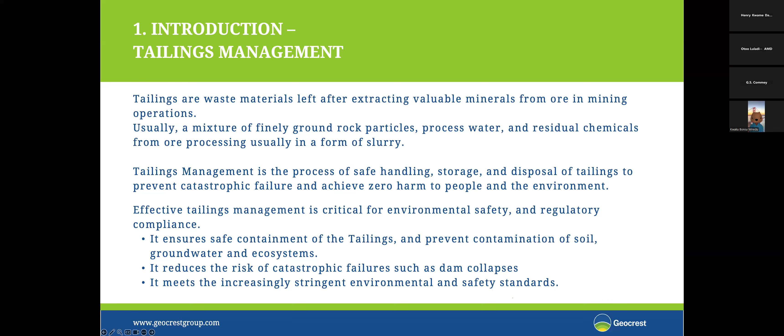So tailings management covers the entire life cycle of the facility, but managing it involves certain key aspects. With this, I also touch on some of the skills that will be required. So we look at characterization and planning.

Like they say, if you fail to plan, you plan to fail. So where you even want to site or locate your tailings facility, its proximity to nearby settlements, is very important. Just look at the geochemistry of the tailings itself. So you need people who are very good with waste rock characterization to come in and advise you through the life cycle of the tailings.

You also have the TSF design. This relies a lot on computer-aided design, CAD. So if you are trying your hands on AutoCAD and other software, I think that is the beginning, before maybe you move into Slide, Wedge, and Map3D and those other software packages you need, because you need to make sure the structural integrity of the facility is protected.

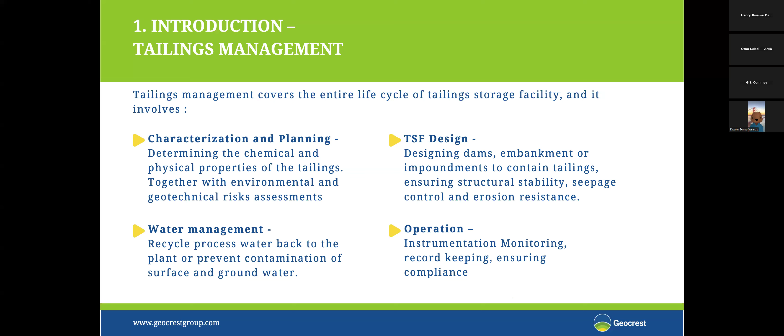And then the last part of the life cycle is the closure and then the rehabilitation. Since we'll be talking more about thickened tailings and paste backfill, we need to drain the water out of it, because tailings management is basically about wastewater management, how you manage water.

When it comes to closure and rehabilitation, for me, I prefer when the land is restored to its original form, not just to the initial topography, but making sure you reintroduce the original flora and fauna that were there before the mine even came. In the life cycle of a tailings or mining operation, the environmental teams put in a lot of effort trying to preserve most of these natural or indigenous plants and species.

So it's very good if we are done with the tailings facility, you're able to restore it to its original landform. The picture below gives an idea of a cross section of a general tailings facility. You have the core impervious fill, and under drainage systems that are able to filter out any form of water. You have the riprap, which is basically waste rock put on the upstream section to control erosion. And freeboard is basically the space between the crest of the embankment and the level of the decant water.

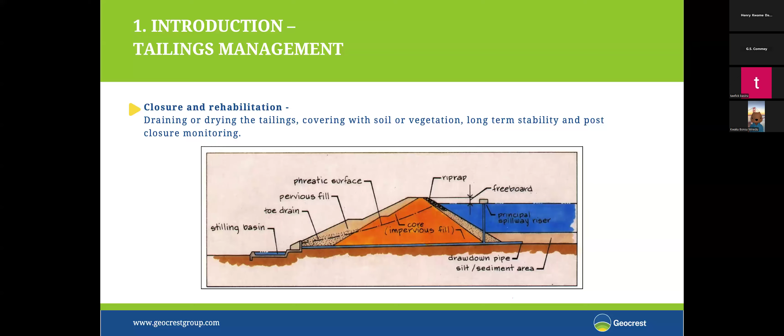So now we'll move into the transition. I've just gone through what a tailings dam is and how tailings dams are managed. Now I want to go into the transition, and once we move from that, we'll look at thickened tailings and then paste backfill. Then we can look at the operational challenges.

Mining operations evolve, as human as we are, we ourselves are evolving over time. We are evolving as a species, and there's continuous improvement. So whatever you're doing, look at ways to improve upon it, look at ways to make it better. When it comes to tailings, there's a lot of focus on how we can make it environmentally friendly, and also now a lot of focus on ESG, achieving certain goals and aligning to certain protocols and systems.

The conventional tailings facility usually has high water content. And if I may say, this shift is not just technical, it is also strategic because it has to reflect our commitment to safer, more responsible, and more efficient mining practices. One of the countries that have really taken advanced tailings management methods seriously is, I'll say, Chile and then Peru.

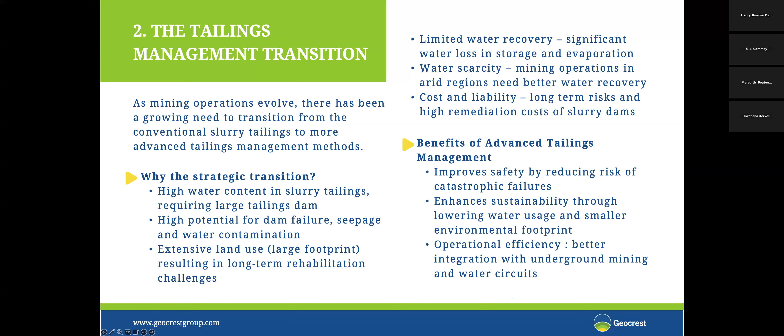So now we'll look at thickened tailings, and this is usually for surface tailings disposal, and it is what we usually call the stack. Once the material comes, I'll share the next slide - I'll share some pictures with you on how a paste, like a thickened tailings facility, looks like.

Usually they extract the water out, and you work with certain specifications. So the target might be to not go beyond 18% or 20%. Let's reduce the water from the slurry from, let's say, 65% to 20%. Once you're able to reduce the water, what you have left is what we call the stack. It's sometimes like, I would say, biscuits. When you extract the water out of it, it comes in like thin sheets, and then you spread it over the surface, allow some bit of evaporation to also improve on the moisture, and then you spread subsequent materials on it.

Some of the benefits for thickened tailings are significantly reduced water loss, also smaller footprint because you're not holding a lot of water. There's improved geotechnical stability - water causes a lot of problems with tailings. There's also reduced risk of dam failures, and it leads to a more efficient and cost-effective mine closure process by creating a better landform because you would have released most of the water. So what you're left with is just the solid particles, which is easier to manage than when it's in a slurry form.

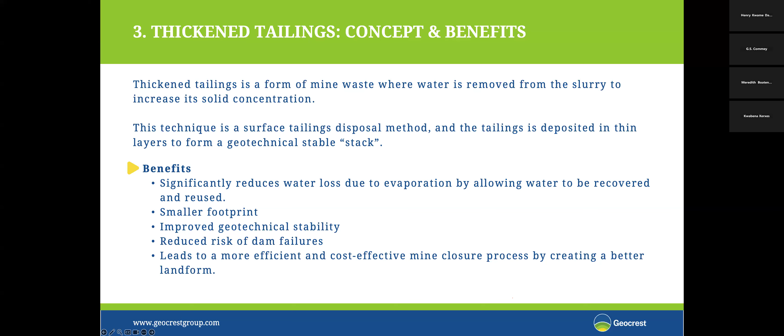The challenges with thickened tailings is that it requires specialized equipment. So if you build your conventional processing plant to treat or extract the ore, you also need to have an adjoining plant whose sole job will be to extract water from the slurry, leaving out the stack. Also, it requires careful pipeline design to avoid blockages. This is where, for some of you, you can also consider hydraulic engineering. Sometimes we rely on hydraulic engineers who are able to work out the flow rates, the viscosity, where to put the bend, how to do the gradient of it to avoid blockages and some challenges in operating a facility.

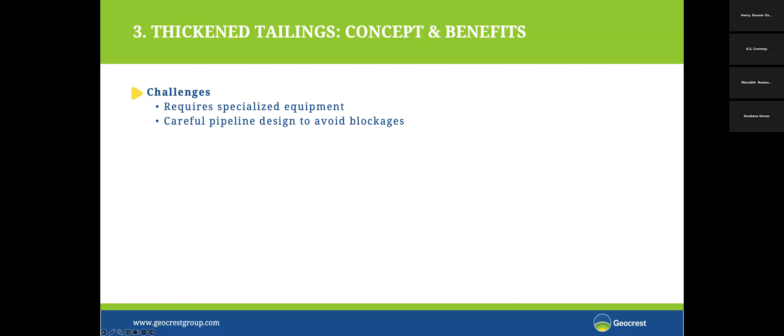Like I did mention, this is an image of a thickened facility. So they usually add a flocculant. A flocculant will basically clump smaller or finer particles together so that they can be easily transported. Otherwise, they will keep floating and it will be difficult for you to decant the water or to reuse the water, if I may say.

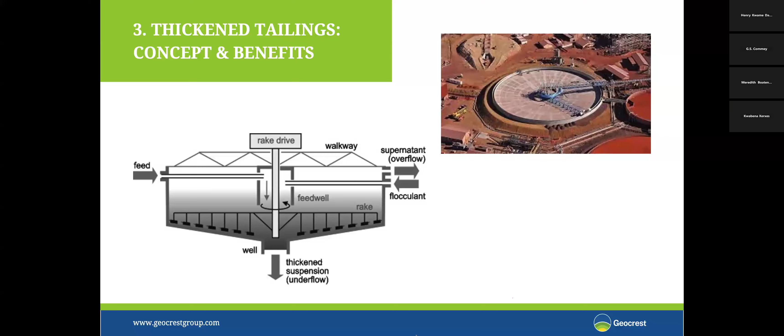So now we'll touch on paste backfill. Thickened tailings has to do more with surface operations, and paste backfill deals with underground operations.

With this, what you simply do is take the conventional slurry, that's the tailings, mix it with cement or other binding materials, and then pump it back into the underground voids and fissures to provide some form of stability for the facility.

So it supports the underground structures, reduces surface disposal, improves safety, and reduces the waste footprint. If you notice, safety is very key in mining, so both of these, safety still comes in here.

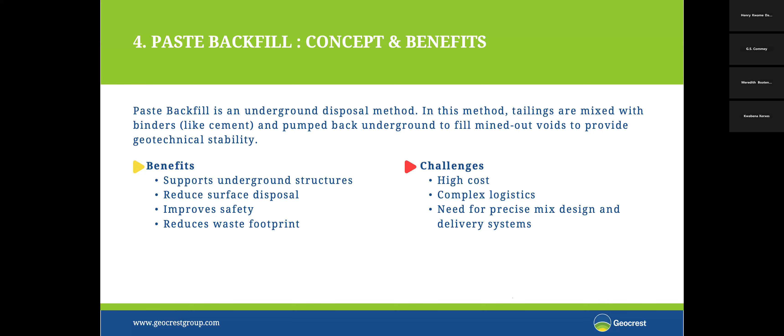One of the challenges is that it's high cost because you need to buy all those chemicals, plus the logistics in moving them to make sure they get to the right places, with vibrations here and there to make sure the material sinks and sits where you want it to sit. You also need precise mix designs and ratios to achieve what you want.

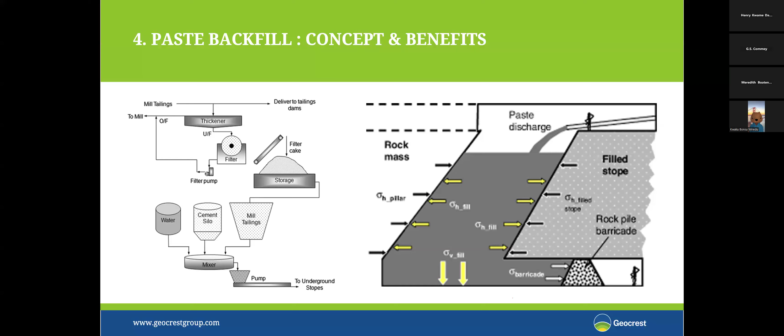Now we are going to move on to the operational hurdles for paste backfill and thickened tailings. One of them is the rheology and pumping challenges. Each slide from here, I'll take some of the operational challenges and then we'll expand on it.

One of the challenges with rheology is that before a dam is constructed, you go through detailed design phases and everything, and all these things are planned before the actual gold is mined. But what happens in the conceptual stage is really different from what happens on the ground day-to-day, because the ore composition changes over time. You might be used to certain weathering profiles while extracting ore at a particular stope or domain, then you move and the composition changes.

So if you are working with the same ratios or estimations, you also need to be very versatile in paying attention to the various changes happening. Whatever material is coming to the process plant, you need to pay attention and adjust your chemical formulas so that you don't have any issues with pumping.

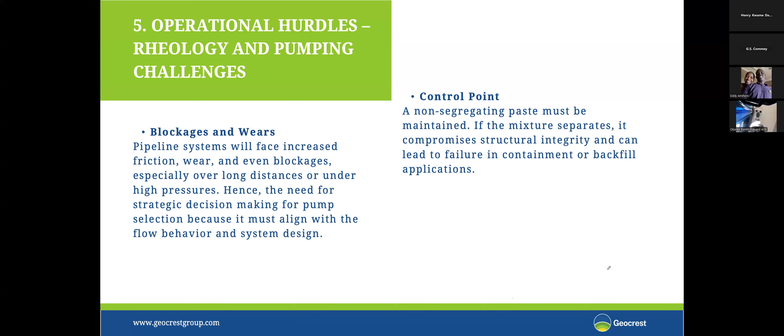Another operational hurdle is operational reliability and control. So you have the thickener underflow control, and with this one, you need consistently achieving the target density. With this one, we have what we call the control limit and then the specification limit. So you need to make sure that, okay, this is the specification limit, but you also maintain the quality delivery

of whatever you are doing. You can also have certain internal control limits to make sure that you don't exceed, so plus or minus whatever range you are dealing with. And there's what we call the risk of roping.

With roping, the materials clump together, they come together, and then they are concentrated at certain portions of the slurry transport. Sometimes it can happen when you have certain sharp bends, or you are not achieving consistent target density, you can have some of these challenges.

And there's the flocculant dosage. Flocculants are basically chemicals that are added to clump the fine materials together into a larger mass. Then it's easier for them to be transported, because if they are all extremely fine and light, then they will just keep circulating and will not really settle.

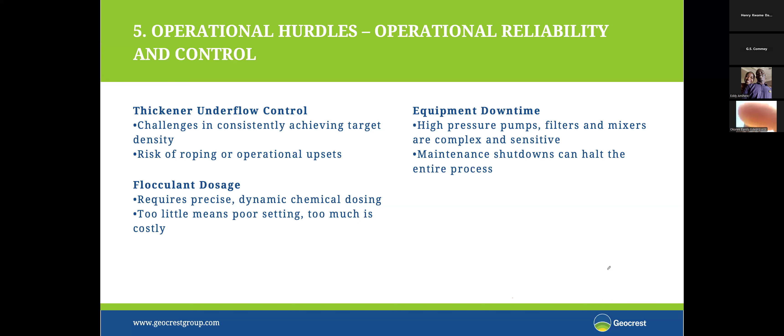Another operational hurdle has to do with geotechnical and deposition risk. So with thickened tailing, you need to maintain some beach angle, a slope from the embankment towards the center of the impoundment.

Sometimes that can be a challenge under varying weather conditions. It's raining today, it can affect it. It's extremely windy today, it can affect it. And then there's drainage and consolidation. We need to ensure rapid water release and consolidation, for stack strength is crucial for long-term safety.

So when it comes to paste backfill, the binder lean zones, inconsistent binder distribution can lead to poor curing. And this is because you are dealing with cement, so you need to make sure that your mix ratios and everything are on point.

And underground instability, weak zones compromise structural integrity and long-term underground support. Certain zones are weak in terms of whatever shearing or process that has happened down there, and you still need to release the paste backfill there.

You have to make sure that your binder distribution is uniform, okay, because binder lean areas will result in poor curing and shrinkage. And this can weaken the backfill structure, okay, and this directly will have an impact on your underground stability and pose serious risks to mining operations.

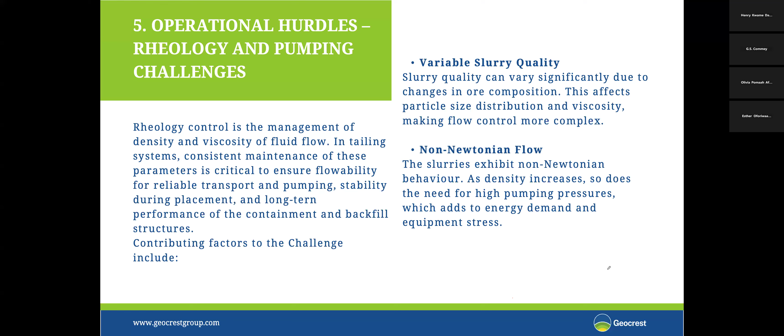So just to recap, we've touched on the rheology and pumping challenges, we've touched on operational reliability and control, and we've touched on geotechnical and depositional risk.

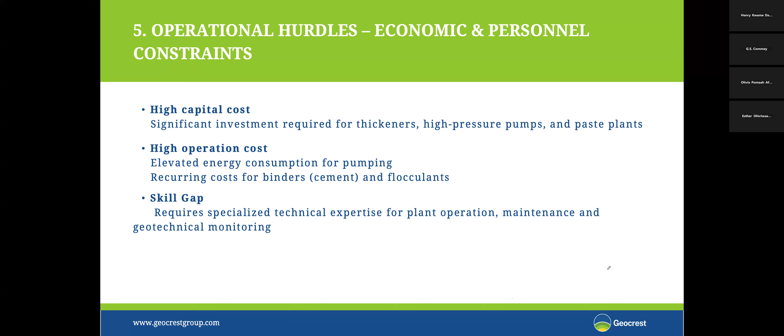And then we've also touched on the economic and personnel constraints. So now we'll delve into the navigation, how we can go about it.

We have real-time monitoring of density and viscosity using sensors and automated feedback loops. You also have blending strategies to reduce slurry variability and stabilize particle size distribution, using additives to maintain non-segregating paste consistency, and specialized pump selection.

Pipe design optimization also comes in: short runs, wear resistant materials, and strategic placement of control valves. The slurry runs through a series of huge pipes between the process plant and the TSF facility itself. Also, thickening and paste preparation.

Automated thickener control systems maintain target density to prevent roping. Dynamic flocculant dosing systems provide feedback from turbidity and settling rate sensors. This is why I'd say too much flocculant, you will not get a desired result.

Too little, you will not get it either. Too much of it also becomes a problem. So if you can be versatile or dynamic, that will also help you overcome some of the hurdles.

And then preventive maintenance schedules for high pressure pumps, so you don't wait for a breakdown before you react. Some people have one or two spare parts, pumping systems, or submersibles available. Whenever it's time for maintenance, they quickly swap it, and while working on the incumbent one, the new one can be running to reduce downtime.

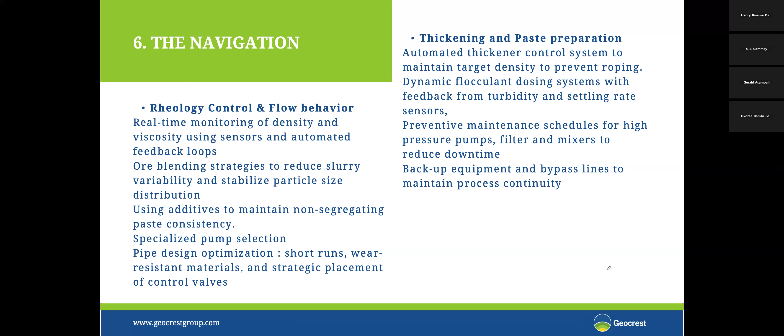And then also stack management with the thickened tailings. Once you have the stack material, you need to come up with a way to properly spread it and allow it to dry before you place the next layer on it. This is where they also use drone surveys, because you quickly fly a drone over the area and it picks up all the information you want.

You can run some simulations with it and see, okay, now let me focus more on, let's say, the northeastern corner or the southwestern corner to spread the material there so I can achieve some gradient.

Just so you have a bit of understanding, for stack management they usually like to slope it gently to the center of the facility so that if there's any form of accumulation of water, because the stack is not 100% dry - you've only reduced the water from, let's say, 65% to, let's say, 20%, so there is still some amount of water.

Once you make sure that as you are stacking the material, you have a gentle slope towards the center, then we put the riser pipe in the center, so any form of accumulation of water or decanting left behind can still be drained out.

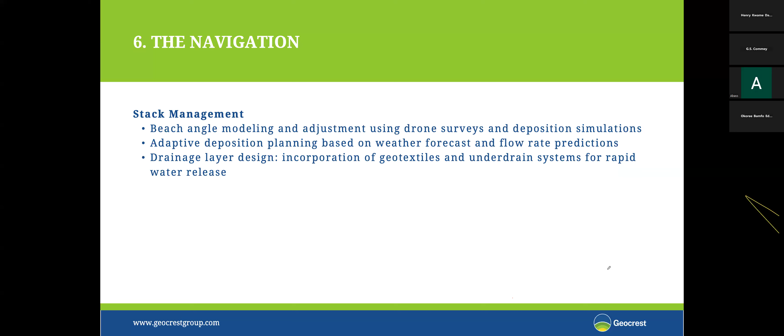Another way is continuous process optimization, using real-time data for density adjustments and advanced technological integration. If you go to a mine site, or if you're privileged enough to get into the control room of a processing plant, you see they have all these screens monitoring a whole lot of stuff. You might not understand it, but if you pay key attention, you know they are monitoring the percentages or composition of certain materials at every point in time. The moment there's a change or a shortfall, there's a trigger system and it gets resolved.

You also have rigorous quality control - it's all part of it - and specialized training for mine personnel. As new equipment becomes available to properly monitor, you take advantage of that to make sure you are optimizing your pumping and your tailings management.

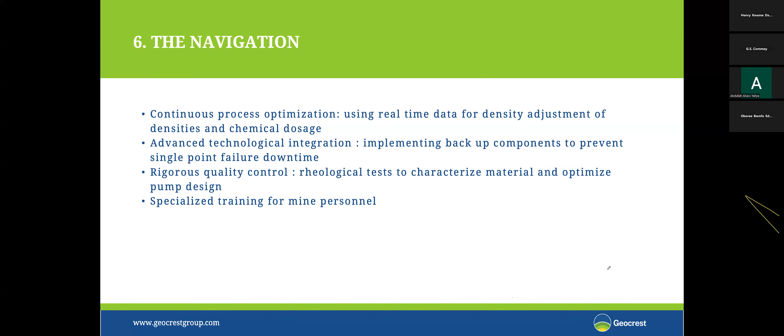So in conclusion, I'll say that advanced tailings management has evolved from a technical option to a strategic necessity. The transition from conventional slurry systems to thickened tailings and paste backfill brings tangible benefits - you can see here we have safety again, improved environmental stewardship, and greater operational efficiency. Because, like I said, all what we are talking about has to do with wastewater management, so effective wastewater management is the key to all we are saying.

This evolution is not without its complexity. Challenges such as rheology control, unpredictable flow behavior, geotechnical constraints, and equipment sensitivity demand more than technological upgrades. They call for skilled execution, responsive design, and vigilant real-time oversight.

Currently in the industry, we don't have enough tailings engineers to manage the conventional tailings facilities that we have. So you can imagine the upside from getting expertise with this thickened tailings and also paste backfill approach. By proactively addressing these challenges with continuous technical and operational excellence driven by data and specialized training, mining operations can not only mitigate long-term risks, but also strengthen their commitment to safety, resilience, and environmental sustainability.